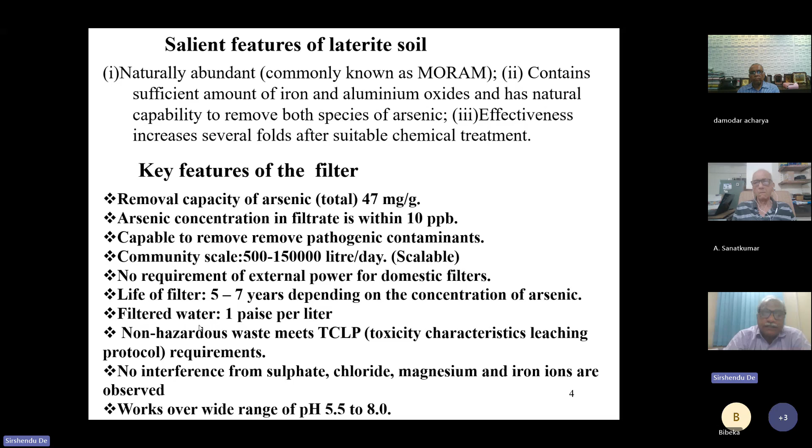Now, some technical terms and information I would like to present here.

This XRD figure shows that the raw laterite has presence of iron and aluminum compounds. The iron and aluminum phases identified in the XRD of the lateritic soil are iron silicon sulfide, magnetite, hematite, iron oxide, geothite, and iron silicon aluminum oxide. These particular phases of iron and aluminum are the potent adsorbent sites for arsenic.

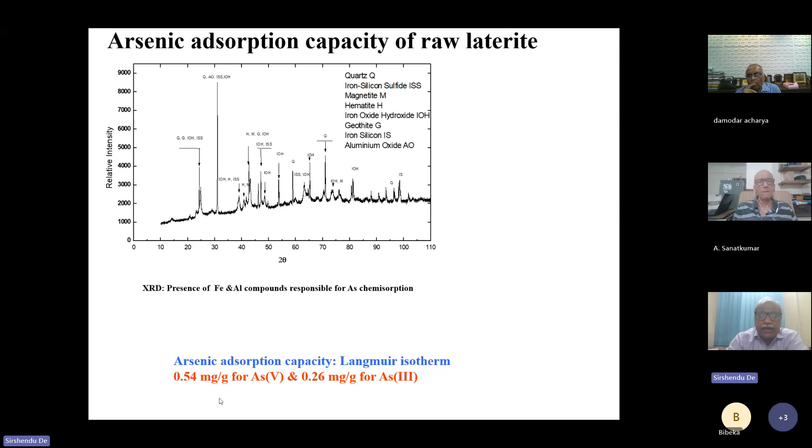Raw laterite itself has some arsenic removal capacity, however low it is. As I said earlier, it has a total of 0.8 milligram per gram of total arsenic removal capacity, although it is less. So what we do is a chemical treatment to increase its capacity several folds.

Now one can ask, how do I find out whether the lateritic soil that I am going to get from our Kharagpur area, or from the Deccan Plateau, or from Madhya Pradesh or Maharashtra, whether that is good enough for arsenic removal or not? For that, we define a scientific quantity known as the degree of lateritization. What is degree of lateritization? It is a ratio of silicon divided by iron and alumina.

The more silicon in the material, the less laterite-like it is. The more iron and aluminum oxide present in the material, the better it is for arsenic removal. So this degree of lateritization should be less for a desirable material, which is a potent source of adsorbent for arsenic.

So we have calculated the silicon to iron-aluminum ratio, the degree of lateritization, for different locations like Kharagpur, Bankura, and Purulia district, and we have found that it is minimum, around 0.42 to 0.5, between Kharagpur and Bankura. So Kharagpur and Bankura laterite are the best among the four.

So if you give me a material which is available from any part of the world, we will just do an EDX analysis that will take 15 minutes, and we will find out what is the degree of lateritization. If it is less than 0.4 or 0.5, then it's a very good material for arsenic removal.

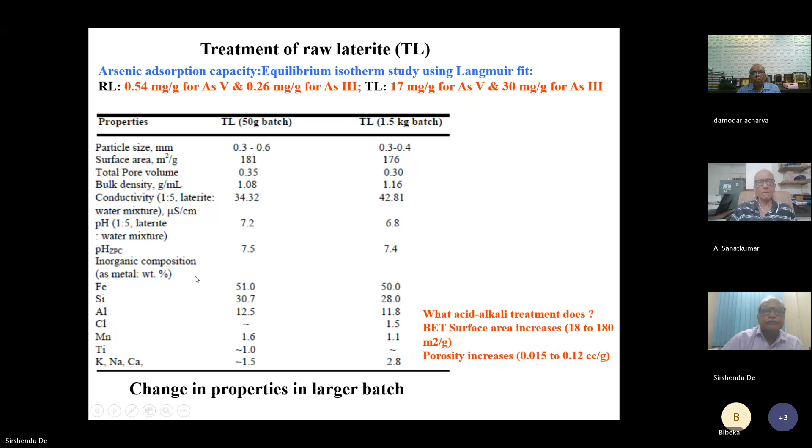Now we look into the disposal of the spent material. When the adsorption is over, it satisfies the TCLP protocol -- that means after its life is over, the material is exposed to harsh pH conditions, low pH as well as high pH. In both cases, the leaching of arsenic is minimal and below detection level. Therefore, no special treatment is required for disposal of the spent material.

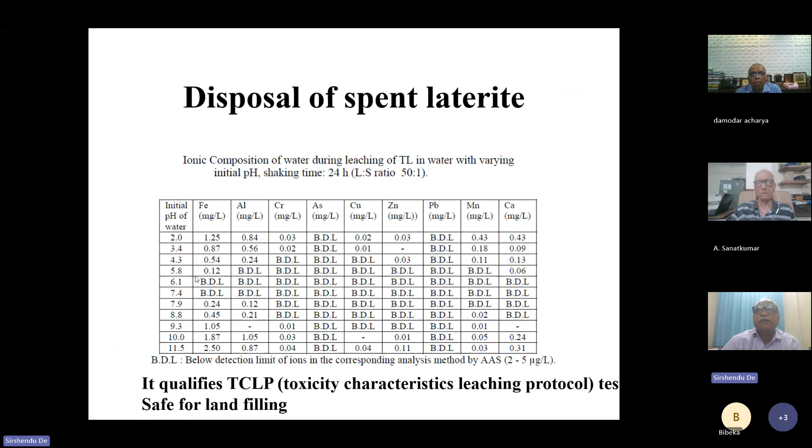It can be directly used as road fillers or land fillers. It can be used as one of the piling materials in the preparation of pavement blocks. Now we come to the detailed design of a single unit.

The single unit here I have shown is a composite bed, prepared with raw laterite at the top of the bed, which removes arsenic to some extent. This is followed by charcoal, basically activated carbon, which removes odor-causing material and organics. Then comes the treated laterite bed, which removes bacteria as well as arsenic. There is also bacteriostatic carbon placed at the bottom so that bacterial contamination from the bottom is prevented.

Now, before putting in this unit, one has to install an upfront unit for the removal of iron. All these filters are basically working with the adsorption principle, so there is an upfront unit for removing iron. Otherwise, in the long term, the iron will be deposited in the actual filter and the filter will be completely blocked. So iron is removed, followed by arsenic and bacteria, and this material is also very good for the removal of heavy metals.

Now we look into the design. There are two types of design: one by heuristic, another going by fundamental principles. The advantage of the fundamental physics-based principles is that it can withstand all sorts of fluctuations in operating conditions. So here we have used two performance parameters and governing partial differential equations, which represent the transport phenomena inside a particle and the transport phenomena occurring inside the fixed bed. And we have developed this performance curve.

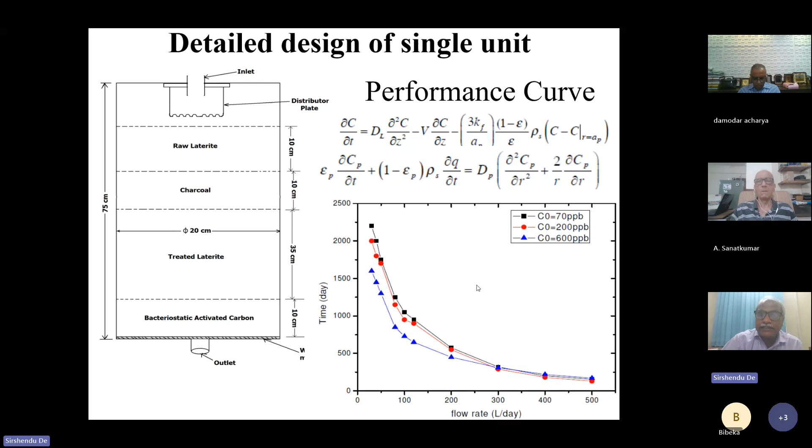Since its capacity is high, during its lifetime one need not go for a chemical-induced regeneration. So here are some snapshots of the filter.

So the first filter, we started this work in 2004. Then we gave lots of presentations to the arsenic task force, Government of West Bengal, and ultimately UNICEF came to us, and we put up a community-scale filter in an affected school in Rajarhat area, where the arsenic contamination was around 100 microgram per liter. This school's filter has a capacity of 500 liters per day.

There are 70 students, around 20 to 25 staff members, teachers, and the midday meal ladies and cleaners, etc. Out of the 500 liters per day, 250 liters is used for cooking the midday meal and drinking purposes. The rest, 250 liters, is used by the villagers. There is a tap outside where the villagers take the water.

So this was the performance of these filters. This data is for 6 years, from 2012 to 2018. In the left-hand panel we have put the arsenic concentration, and in the right-hand panel the iron concentration. Looking at arsenic, the black dots are the concentration in the feed and the red dots are the concentration in the filtrate. The black dots vary from 50 to 225-230 microgram per liter at certain times.

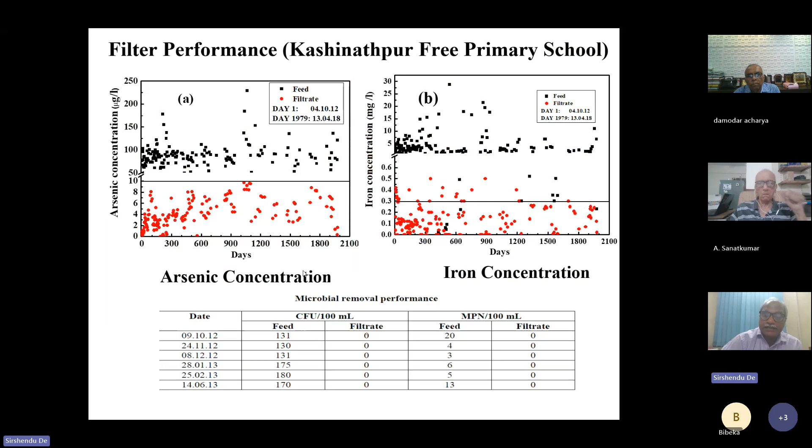Some of the domestic filters that we have deployed in various places. Now there are more than 50 places where we have distributed these in various districts as well.

Here I have given an example. This is a lady in whose house this filter was deployed. This is a hand-operated filter, so no electricity is required for this household filter. On the top bucket, we just put the water. There's a pinch cock that controls the flow rate of water into the filter body. In the filter body, there are different layers of material, as shown earlier, and the water gets filtered and comes out. There is no wastage of water like with an RO filter.

If you look at the performance over 3 years, 2012 to 2015, the concentration of arsenic in the feed is around 100, 200, sometimes 300 ppb, but in the filtrate it is always less than 10 ppb. If you look at the iron concentration, it can be as high as 4 to 5 ppm in the feed, but the concentration of iron in the filtrate is less than 0.3 ppm.

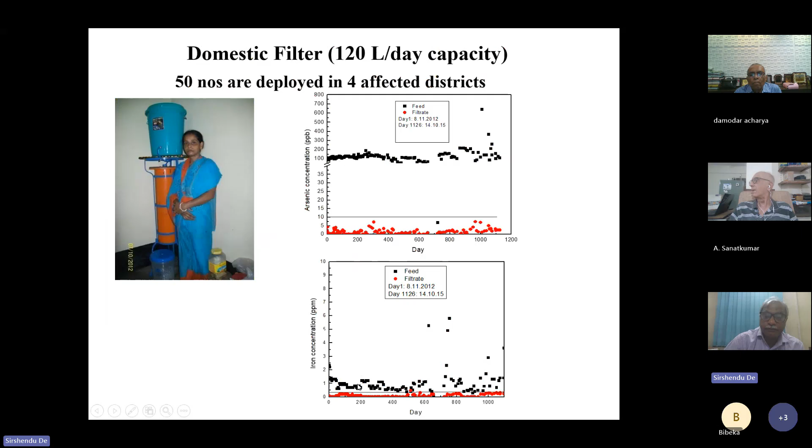Some more community scale filters that we have deployed in different places, like Ambika Girls School, with 1500 liter per day capacity, deployed in 2013, where the inlet concentration was 290 ppb and the filtrate is 2 ppb. Similarly in Malda Rotua Block 2, also sponsored by UNICEF.

After showing these results, we got approval and recommendation from the Arsenic Task Force, Government of West Bengal, and the technology was transferred to 3 companies. By now, one of these companies, a vendor working with government organizations like the Public Health and Engineering Department,

has deployed more than 550 filters of 2 meter cube per hour capacity in West Bengal and Assam. A Ranchi-based company has deployed community scale filters in different places in Jharkhand, Bihar, and UP. Another company sells the domestic filters and has deployed more than 100 filters in different affected areas.

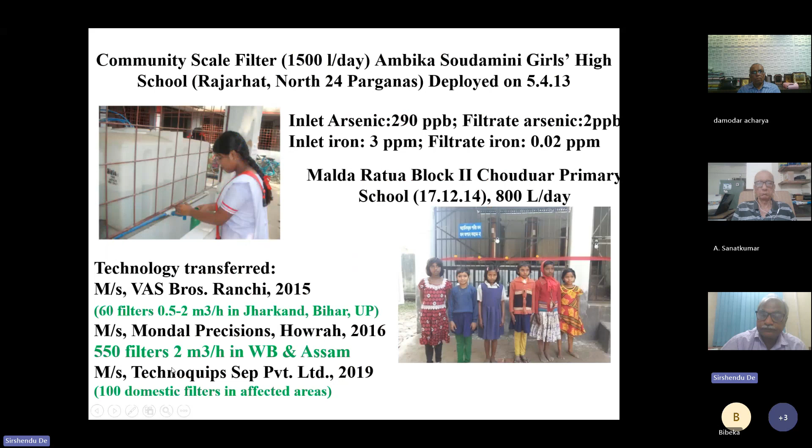This is one of the community scale filters, 2 meter cube or 2000 liter per hour capacity. Typically these filters run for 5 hours a day, producing 10,000 liters of water, catering to a cluster of villages. This is one place in Nadia district, where the concentration in the feed is 110 microgram per liter, and in the filtrate it is below detection level.

Similarly for iron. These are solar powered - there is a solar panel that pumps the groundwater up to the overhead tank, and from the overhead tank it flows by gravity through the filter columns, finally producing filtered water.

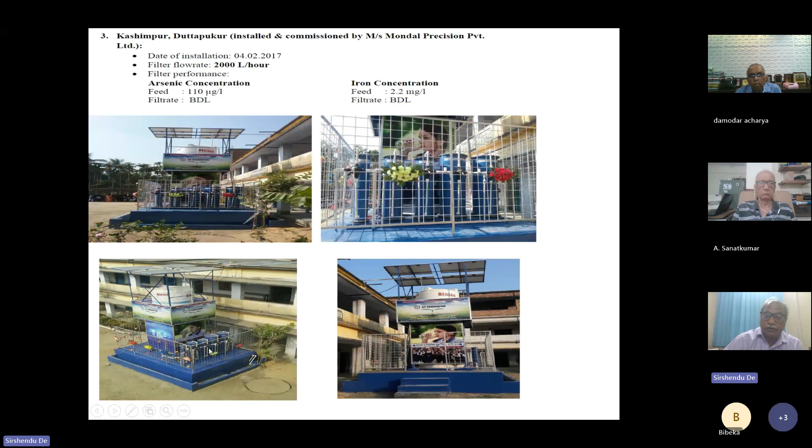This is a test report from the government Public Health and Engineering Department. Every district has a test house established by the Public Health and Engineering Department, Government of West Bengal, and the performance of our filters is monitored every month. This is one of the typical results shown in the test house of the Public Health and Engineering Department in Barasat division.

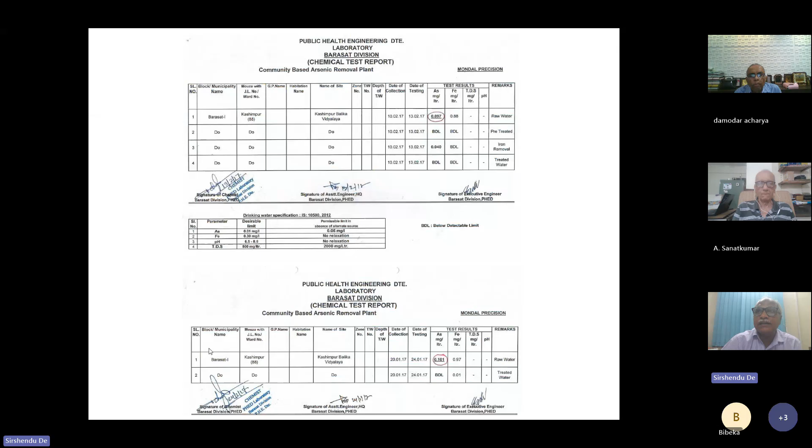It is not that we bring the samples to IIT and measure them ourselves. The performance of the community scale filters is continuously monitored by the state laboratories.

Let me talk about the elements of innovation in this technology. This is a low cost technology without compromising the quality of the material. If you look at the material cost, the laterite costs 100 rupees per kg, including electricity, utilities, and labor. Comparatively, activated alumina, a synthetic material, costs around 250 rupees per kg. The design has very high capacity and a long life of 5 to 7 years.

Then there is the value addedness - it removes iron, bacteria, and arsenic, all 3, and it also removes heavy metals like lead, uranium, zinc, and cadmium. There is no regeneration required during its lifetime, so the maintenance is minimum. And there is easy disposal - since it satisfies the TCLP protocol, we do not require any special treatment for the disposal of the spent material.

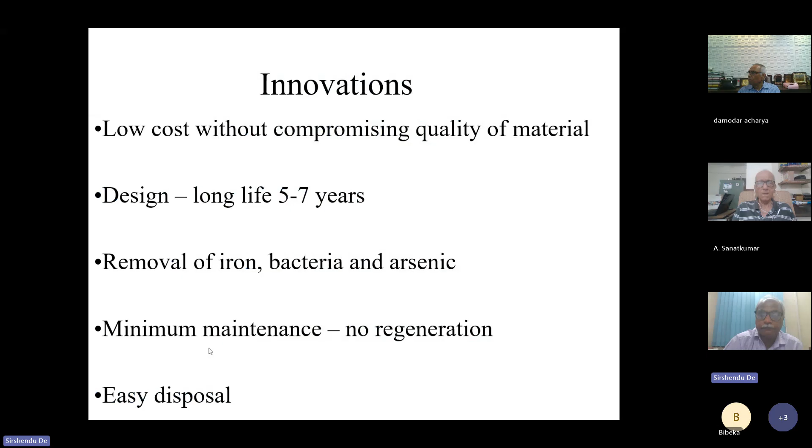So this is the status of the technology. It is shortlisted as one of the top 4 technologies in the Reed Elsevier Environmental Challenge in 2015. It is a finalist of the Dhirubhai Ambani Prize in 2016. We got the Indian Desalination Association Innovation Award in 2016, the Hindustan Dorr-Oliver Award from IIChE in 2017, and the NRDC Award in 2017. This technology is recommended by the Arsenic Task Force, Government of West Bengal, as well as the Mashelkar Committee recommendation we received from the Ministry of Drinking Water and Sanitation, Government of India. It has been rated as one of the 100 best innovations in India in 2021 by the Indian Innovators Association. It has been transferred to 4 companies for commercialization. 550 community scale filters are now installed at different places in India, catering to about 8 lakh people per day.

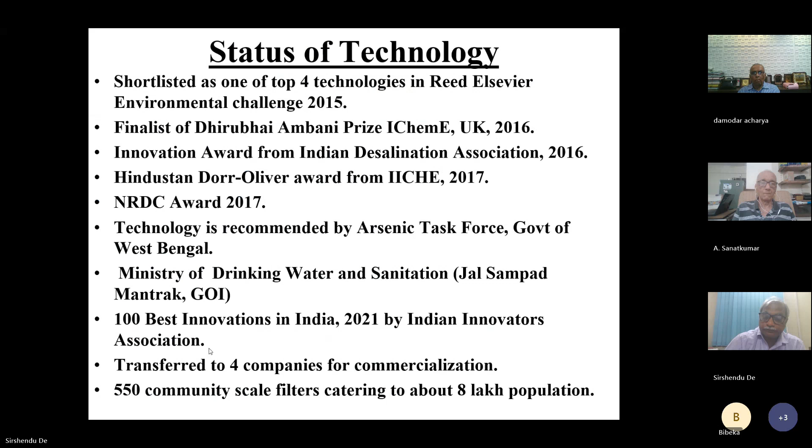Next case study, I'll be talking about the fluoride removal filter. Similar to arsenic, fluoride poisoning in the groundwater is also a rising concern. The disease caused is known as fluorosis. There are 2 types of fluorosis: dental fluorosis and skeletal fluorosis. Excess fluoride in the groundwater basically weakens the bone. In dental fluorosis, there will be yellow stains on the teeth, and it spoils the teeth in early years. In case of skeletal fluorosis, it is even more dangerous - the bones get weakened, and this can cause an early onset of osteoporosis.

200 million people have been affected in 25 nations, and 11 states have been affected in our country, including Telangana, Andhra, Rajasthan, Gujarat, Punjab, Haryana, and 4 districts in West Bengal like Purulia, Bankura, Birbhum, and North Dinajpur. They have been adversely affected by the fluoride concentration in the groundwater.

The maximum permissible limit of fluoride in groundwater is 1.5 milligram per liter. If you compare, the allowable concentration of arsenic is 10 microgram per liter, while fluoride is 1.5 milligram per liter - so there's a 1000 order of difference between the allowable limits. That means arsenic is more lethal compared to fluoride. But typically, fluoride concentration occurs in groundwater between 2 to, in some places, 20 ppm or 20 milligram per liter. So that is also equally bad.

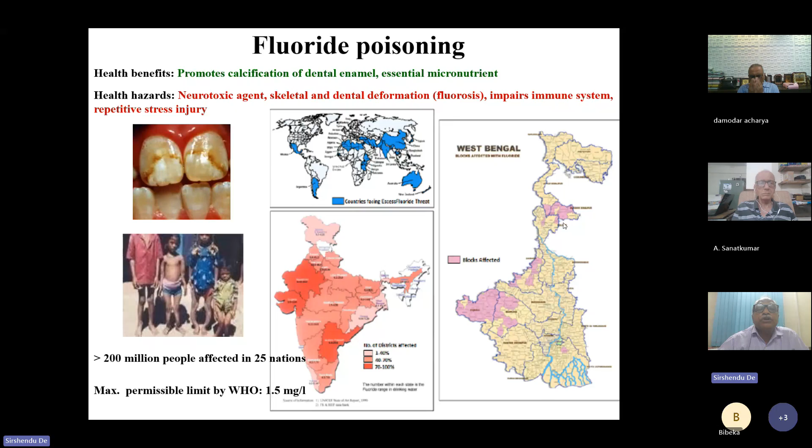So we tried to look into how to remove this pollutant from the groundwater. We did a market analysis and looked into various existing fluoride removal filters - there are 2 technologies that typically exist. One is membrane-based reverse osmosis nanofiltration, and another is adsorption-based using activated alumina or activated carbon. The membrane-based filters are very expensive - the maintenance is not easy, and there will be fouling of the membrane, requiring replacement, which is a costly affair.

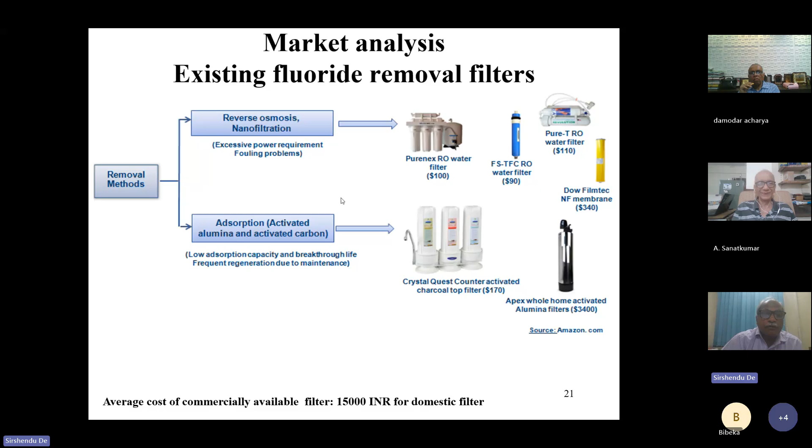Even for activated alumina based filters, the fluoride adsorption capacity is very low, only 5 milligram per liter, so it does not last more than a week. Within a week, one has to do chemical regeneration, which is expensive - chemicals are used, and the regenerated fluoride again goes back to the groundwater and recontaminates it. So the average cost of these commercially available filters is 15,000 rupees for a domestic filter.

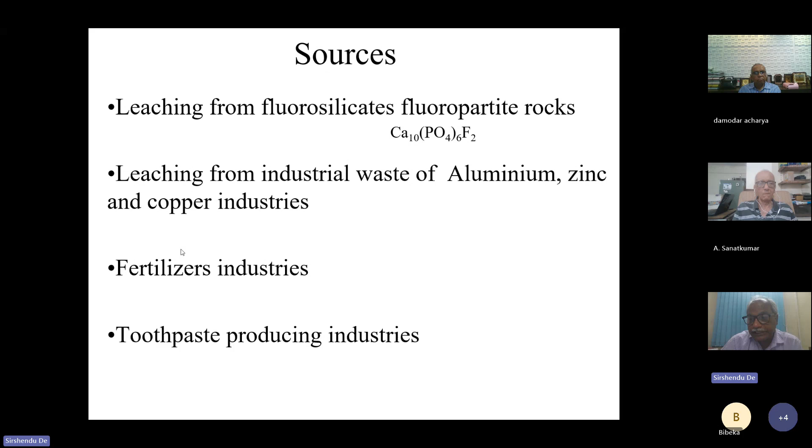Now we tried to develop a material for fluoride removal, and tried to find out why fluoride is contaminating the groundwater. We found there are 4 sources of fluoride leaching and contamination. First, like arsenic, fluoride is available in rocks in the form of calcium fluoroapatite - this phase degrades over millions of years because of weathering and other causes, releasing fluoride that contaminates the groundwater. Leaching from industrial waste like aluminium, zinc, and copper industries can also contaminate the groundwater. Fertilizer industries, where fluoride is used, can also leach out and contaminate groundwater. Toothpaste producing industry effluent is also leached and contaminates the groundwater. So these are anthropogenic as well as geogenic causes for fluoride contamination in the groundwater.

Now, what do we do? We tried to develop the hydroxyapatite phase. When this hydroxyapatite phase is there and it is replaced by fluoride, this is known as fluoroapatite. So we tried to develop this hydroxyapatite phase in the laboratory using simple chemicals.

This calcium phase removes the fluoride, because one calcium attracts two fluoride atoms, so it forms calcium fluoride, CaF2. So two fluoride atoms - so what do we do?

We carefully substitute some of the calcium with aluminum, so we call it aluminum substituted hydroxyapatite. This increases its capacity several folds, because aluminum attracts three fluoride atoms while calcium attracts two. So if we substitute some calcium with aluminum, its fluoride removal capacity increases. We developed this aluminum substituted hydroxyapatite phase in the laboratory using commercial grade chemicals.

Now this material is produced in powder form. The powdery material cannot be used as a fixed bed for fluoride removal. So what we did is develop this particular phase in situ with a porous carbon scaffold. The porous charcoal, which is commercially available porous carbon, is used as a support material, where inside the pores and on the surface, this aluminum substituted hydroxyapatite is generated in situ.

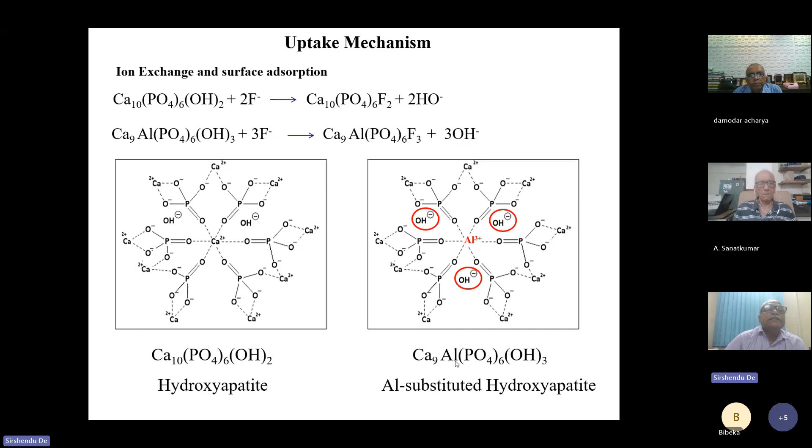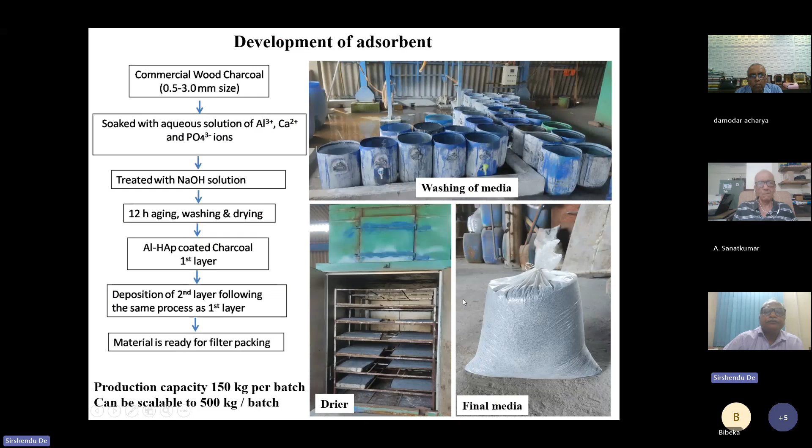Since we are producing the carbon scaffolds in millimeter size, they are granules - we are not producing powder. Ultimately we are producing granules, and this is the final media that is produced. Using this media, the filter is developed. So these are some of the properties.

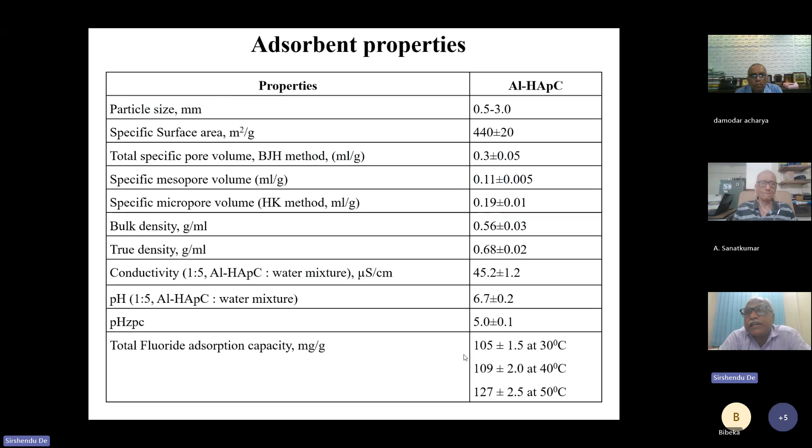If you see, the total fluoride adsorption capacity of this media is 105 milligram per gram at 30 degrees centigrade. The nearest competitor is activated alumina, which has a capacity of only 5 to 6 milligram per gram. So almost 15 times more capacity we get from this particular media.

So we compared this with the granular media, and we found that among all the granular media, we have obtained the highest ever reported value - 105 milligram per gram - which has a particle size of 0.5 to 3 millimeters. This is an ideal medium size for preparation of a fixed bed adsorption reactor.

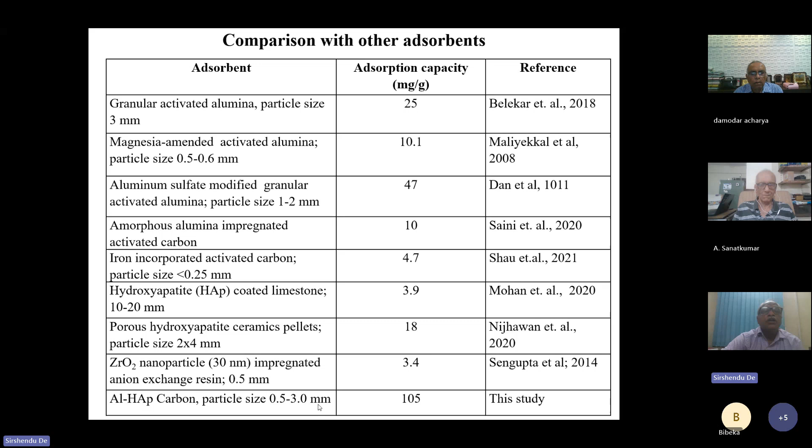Then we characterize the adsorbents using FESEM and EDAX analysis. It is clear that this is the carbon scaffold I was talking about, and inside the carbon, the hydroxyapatite phases have been generated, and those are the potent sites where the fluoride gets absorbed. If you look into the EDX curve, there is a peak of fluoride after adsorption which was not there before adsorption. This proves that the fluoride is being absorbed within the media.

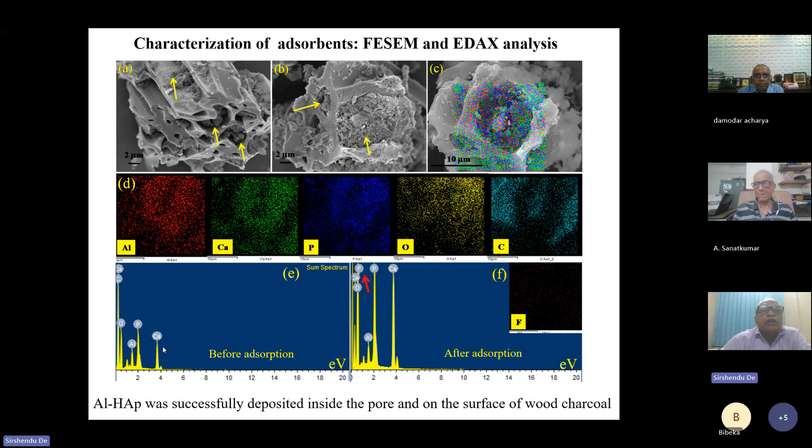Phase analysis using XRD and FTIR spectroscopy. This analysis shows the signatures of the presence of aluminum hydroxyapatite inside the carbon.

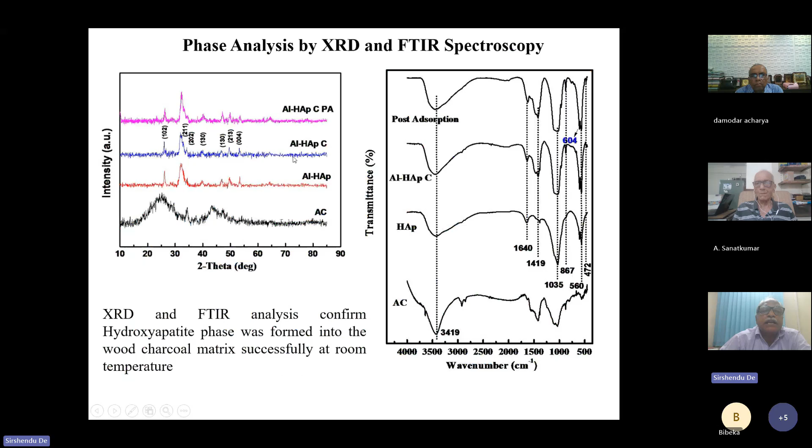Then comes the disposal of the spent medium - how we dispose of the medium. Since we are using the carbon scaffold, this particular medium will have some calorific value. The calorific value of lignite coal is 6,500 calorie per gram. The calorific value of our aluminum hydroxyapatite Al-HApC material is 2,200 calorie per gram. So therefore we can extract some calorific value out of this media.

So this media, after its life is over, can be used as fuel. If we mix the spent media with lignite coal in the ratio 1:20, we get a calorific value of 5,000 calorie per gram. The spent media adsorbent is mixed with coal and used as fuel.

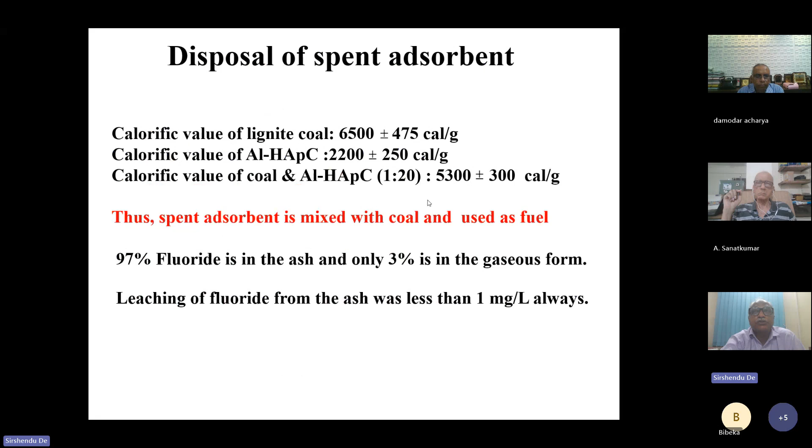We have done the analysis - 97% fluoride is in the ash and only 3% is in gaseous form. So it does not contaminate the environment, and leaching of fluoride from the ash was always less than 1 milligram per liter. So after its life is over, this media can be used as fuel, and the ash will not contaminate groundwater, and the gaseous form also does not have any fluoride contamination.

Now we have prepared the domestic filter as shown earlier, using the same layer-wise media, and this is deployed in different places of Bankura and Purulia district. This is one place, in his house, where the domestic filter was installed, and more than 1 year of data is available. If you look at the feed concentration of fluoride, it varies.

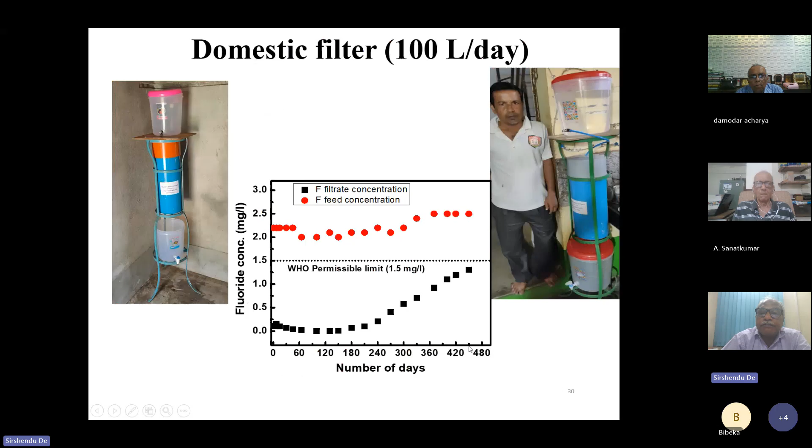It is around 2 to 2.5 milligram per liter, and the filtrate concentration increases over time. This particular filter was designed for 1 year. If you look at the performance, it stays below the permissible limit, working fine up to 450 days. After that, the filter media will be changed.

Another community scale filter of 500 liter per day was installed in one of the schools in Bankura district. This filter is still running. Here the feed concentration is around 3 milligram per liter, and the filtered concentration is always less than 1.5 milligram per liter.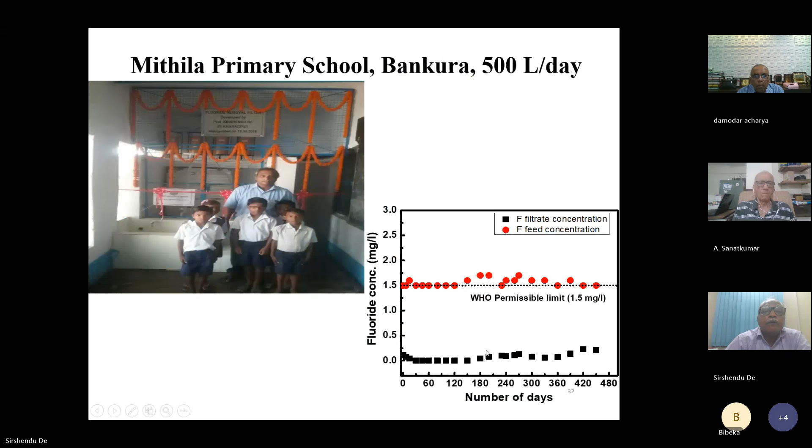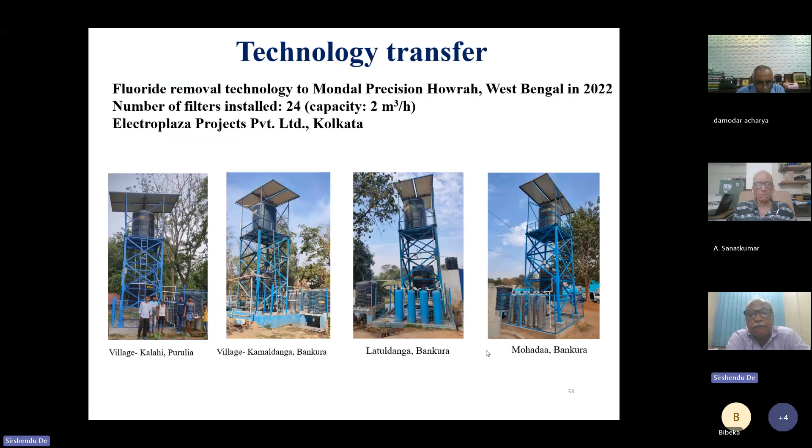So this technology was transferred again to companies, and they came up with more units. By now there are 34 filters deployed in different places of Purulia and Bankura district, and now this chart is very important.

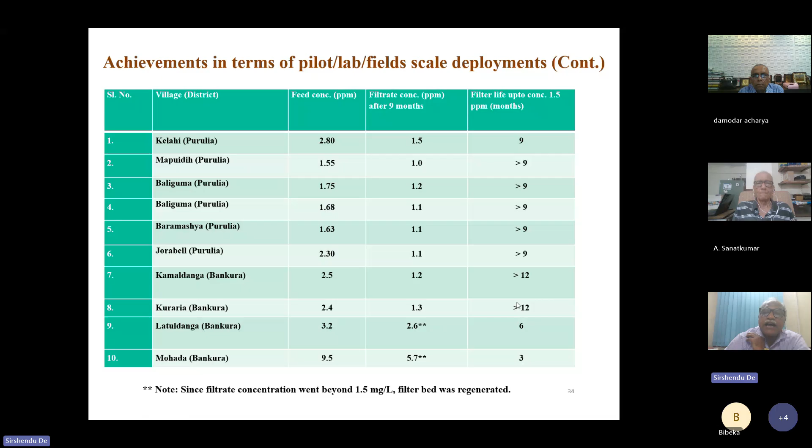This gives the filter life at different locations. Based on the feed concentration of fluoride, we have charged around 80 kg of the material in 2 columns, and we have seen that depending on the feed concentration of fluoride, the filter life varies from 9 months to more than 12 months. So these filters are designed for 12 months, and after 1 year the media has to be replaced.

One of the domestic filters has been deployed in a house where the kid is having dental fluorosis.

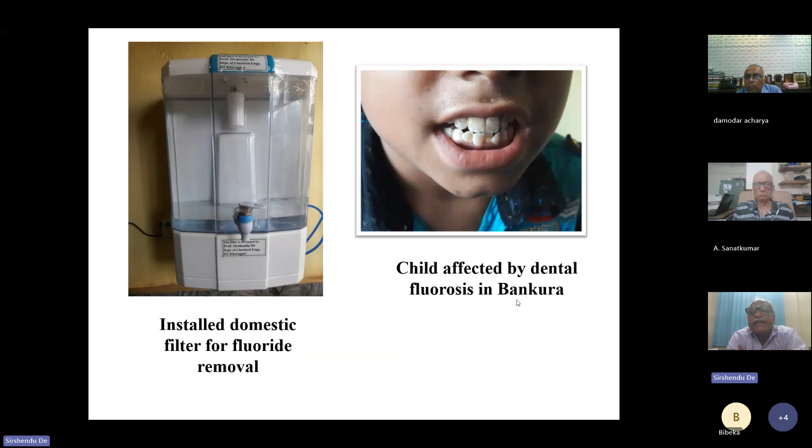Let us do a cost comparison with other filters in the market. Looking at different filters of the same capacity, 120 liter per day domestic scale filters, the cost varies, above 15,000 rupees, while our cost is 4,600 rupees, around 5,000 rupees for 1 year. After 1 year, the filter media has to be replaced, requiring a recurring cost of around 600 rupees. So the cost is 1.3 paisa per liter.

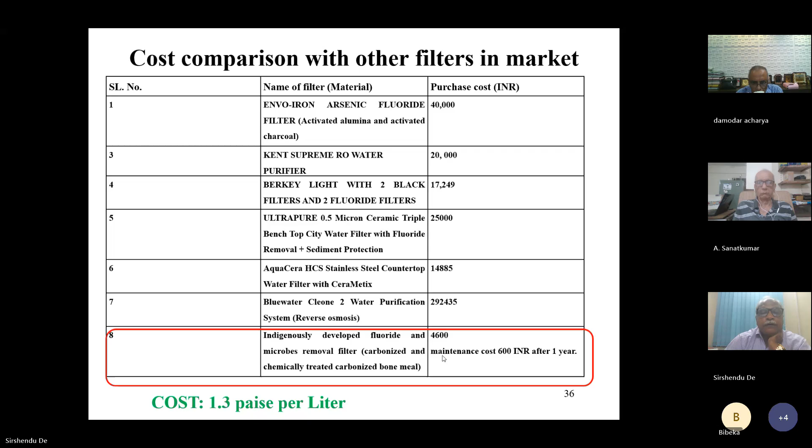So this is the status of this technology. It has received the IGCW award by Green Chemistry Foundation in 2023. It is recommended by the Fluoride Task Force, Government of West Bengal, and transferred to 2 companies for commercialization. Currently, 34 community scale filters are in operation, catering to about 1 lakh people in affected districts per day.

Next case study, I'll be talking about the treatment for rice mill effluent. In a typical rice mill, depending on its size, one can get effluent to the tune of 50,000 to 150,000 liter per day. That much water is extracted, and they use the same water for 2 cycles, meaning every week they extract water from the ground 3 times.

Just imagine, in the district of Burdwan in West Bengal, there are 1,500 rice mills. Imagine how many rice mills are there in all of West Bengal, each extracting roughly 150,000 liter of water, 3 times a week, from the groundwater, and how the groundwater will be depleted.

The effluent generated from these rice mills is high in organics, foul smelling, and there is no proper treatment. They just discharge it to the nearby canal. When this water goes off from the canals to agricultural lands, there is protest, and farmers often do road blocking. So proper treatment is required.

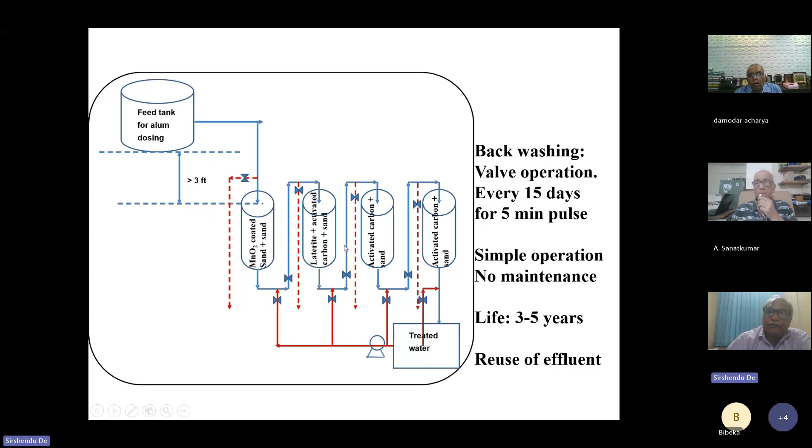So this is a 40 KLD plant, 40,000 liter per day capacity pilot unit installed in Sreema rice mill in West Bengal, in Hooghly district. The water flows through a series of columns, and finally this is the raw water, which is yellowish in color, and this is the treated water, which is very clean.

If you look into the various parameters, this is the performance for 2 years. It was installed before lockdown, 13 March 2020. Initially it was 10 KLD capacity. Later on, its performance was so good, it was upgraded to 40 KLD capacity. And at the end of 2 years, it is showing almost steady performance.

The filtrate, that is clean water, it is being backwashed with pulses of 5 minutes. But is all the clean water used in the backwash, or only a small quantity? Small quantity will be required every 15 days. Every 15 days, one has to do a backwashing.

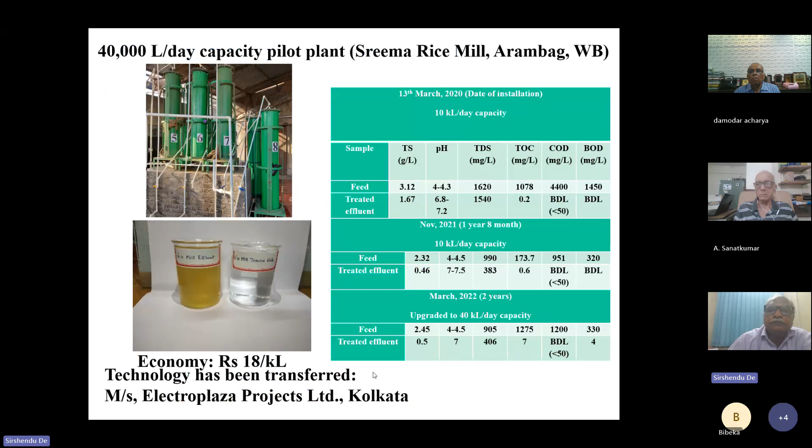Next case study, I'll be talking about cyanide removal from steel plant effluent. In a steel plant, there are lots of cyanide in the effluent. These cyanide concentrations can be anything between 5 to 20 milligram per liter, and the permissible limit of cyanide in any surface water is 0.2 milligram per liter.

So what we do, we did a very simple treatment in presence of UV light and air bubbling. We add hydrogen peroxide, at a dose of 5 liter per meter cube. The hydrogen peroxide gets degraded to form hydroxyl radicals OH dot, and in presence of air, they finally form bicarbonate salt, nitrogen gas, and water.

So what we require is a hydrogen peroxide dose of 5 liter per meter cube with continuous air bubbling in presence of UV light. So it is a photodegradation technique, but without any sludge generation.

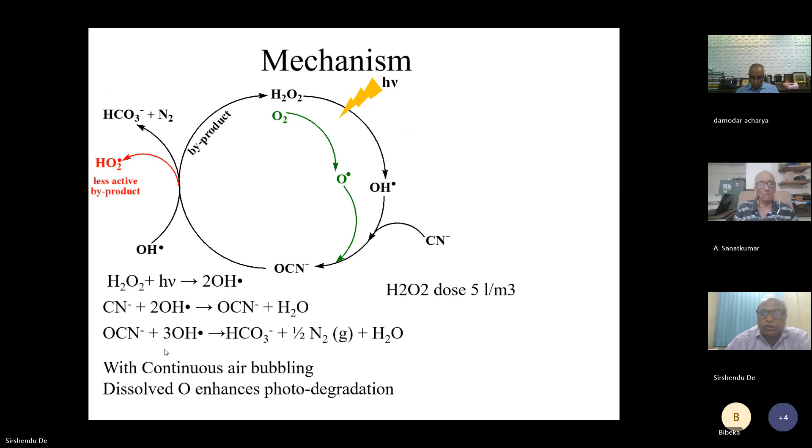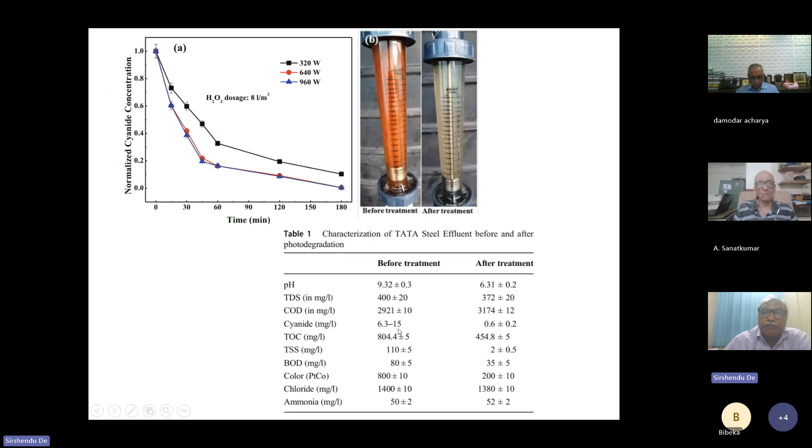Using this technique, we developed a process for Tata Steel, because we have a project with Tata Steel. If you look into the cyanide concentration before and after treatment, it was up to a maximum of 15 ppm before, but after treatment it was 0.6 ppm.

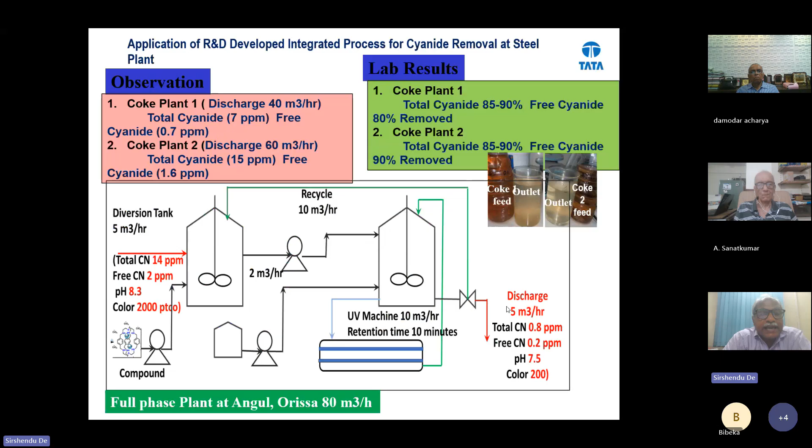So they came up with a plant with a capacity of 5 meter cube per hour in the Jamshedpur site, at the Tata Steel site, and they ran this plant with our technology for 6 months. They developed confidence, and came up with a plant at Angul with 80 meter cube per hour capacity, and it was working fine. Since then, I would like to mention one of the shortcomings of this technology.

This plant was run for about a year without any problem, and then suddenly I heard that the plant was stopped and not in operation. Then I inquired what is the problem. Ultimately it came out that it is not a limitation of the technology.

It is because the hydrogen peroxide we use in the laboratory is just 1 liter, 2 liter, but in the plant, where you are treating 80,000 liters of water per hour, the amount of hydrogen peroxide requirement is very high. So they have to store hydrogen peroxide, and storage of hydrogen peroxide is not normal, because under normal temperature and pressure, hydrogen peroxide breaks into oxygen gas. If you do not take proper precautions, one has to sprinkle water onto the storage vessel to keep down the temperature.

If you do not do that, there will be a build-up of oxygen gas after its degradation, and there may be a blast. In fact, that has happened because of not taking proper precautions. The whole storage vessel storing hydrogen peroxide blasted, and there was an accident, and that's why this plant was stopped. But that was not the fault of the technology, it was the fault of the storing of hydrogen peroxide. That means whenever a technology becomes successful even at real life scale, it is not the technology but the other paraphernalia and procedures that have to be followed properly.

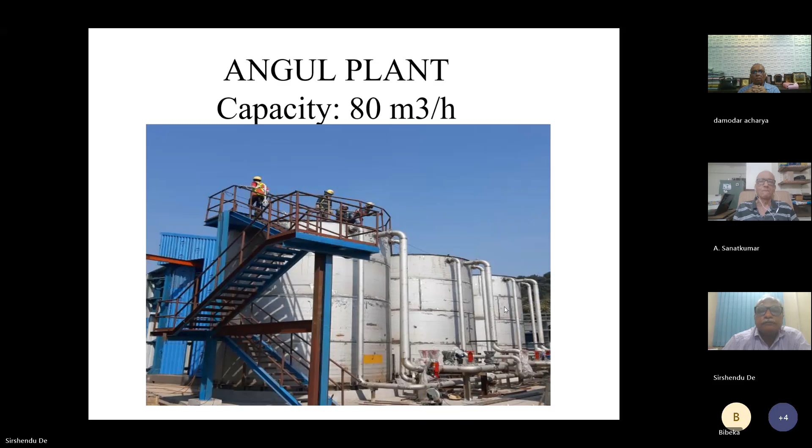Next case study, I will talk about the treatment of refinery effluent. Here we are talking about an effluent of HMEL, the HPCL Mittal Energy Limited. They have their refinery plant at Bathinda, Punjab. The problem in their plant was they had a standard effluent treatment plant consisting of primary, secondary, and tertiary effluent treatment.

In the secondary treatment, they use the activated sludge procedure, and after that they use a membrane bioreactor as tertiary treatment. Their final objective is to get water with COD less than 20 ppm at the final stage. They were not achieving that because their secondary treatment plant was not operating properly. The membrane bioreactor tertiary treatment was very expensive. The membrane needs replacement every year, and every year they spend 5 crore rupees to replace the membranes. So they wanted a simple technology to remove COD.

So our objective was to do away with the secondary treatment process. The secondary treatment is basically the most time consuming - it is very slow, and it is also space consuming, requiring a huge amount of space. So that becomes a bottleneck in most cases. The third most difficult thing is that the bacteria nurtured in the activated sludge process for degradation of organics - maintaining those bacteria and their growth environment is also difficult.

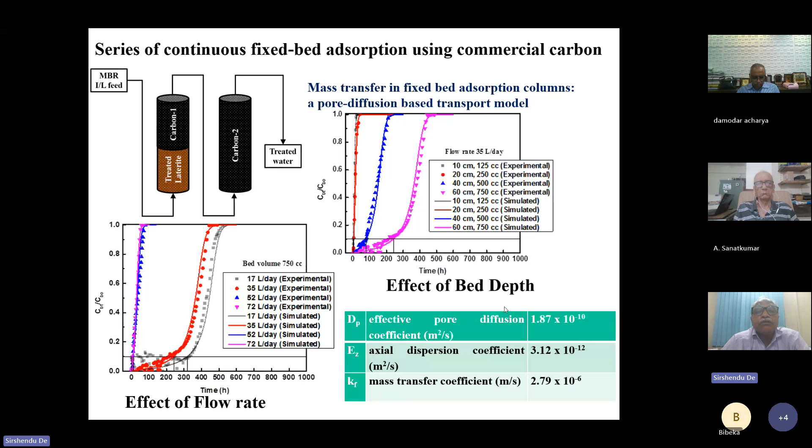So what we did was use two continuous fixed bed adsorption columns using commercial carbon, and we were able to bring down the COD concentration to less than 20 milligrams per liter. We developed a scaled up process flow diagram where first we give a laterite column along with an oxidation medium, then followed by the carbon column. There are 4 carbon columns which will be used to remove this.

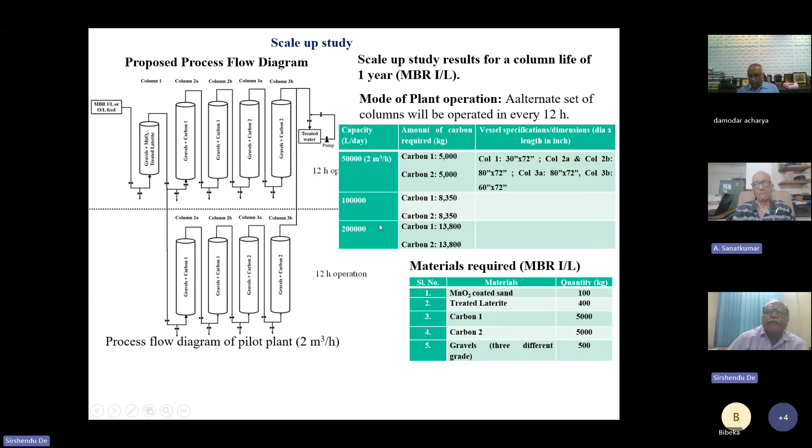Using the fundamental theory, we scaled up this system and proposed the amount of carbon required, and the specification and dimensions of the various columns required for 2 meter cube per hour, 1 meter cube per hour, 50,000 liters per day, 100,000 liters per day, and 200,000 liters per day. So they came up with a plant of 50 meter cube per day capacity at their site, and now they are doing trial runs with this plant.

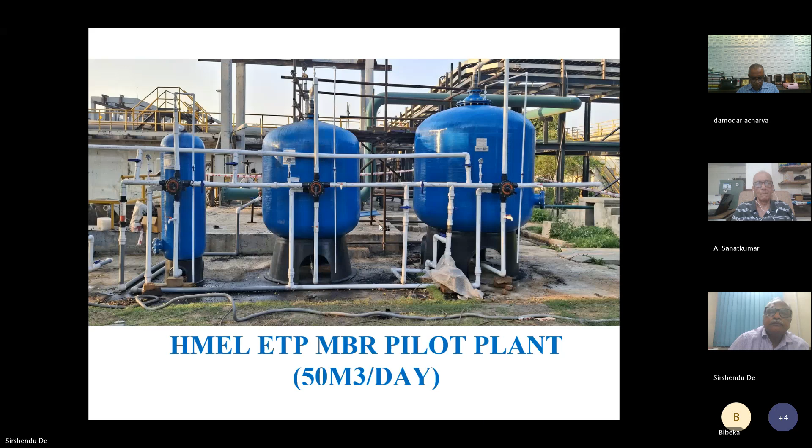Next, we talk about the treatment of sewage water for reuse. This project we got from Kolkata Municipal Corporation. Here, the sewage water that is being wasted - if we can reduce the parameters to a level such that the water can be used for road cleaning, gardening, and tree cleaning, etc. So we developed a simple process, and the whole focus was to make the primary and tertiary treatment so efficient that we should not be dependent on the space and time consuming secondary treatment. That means we would like to do away with the secondary treatment process altogether.

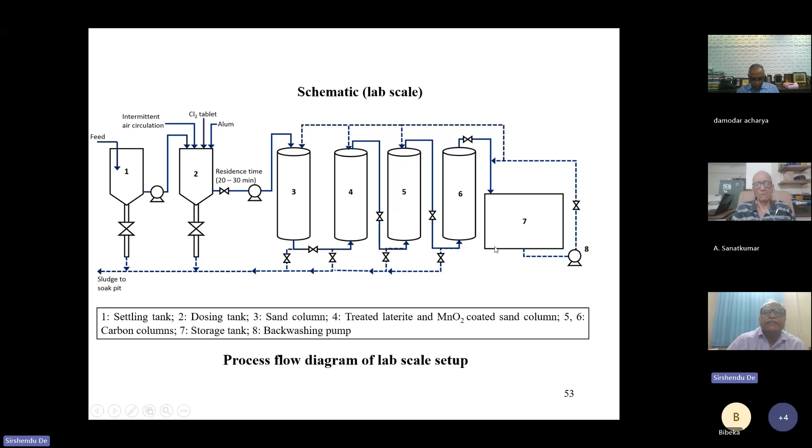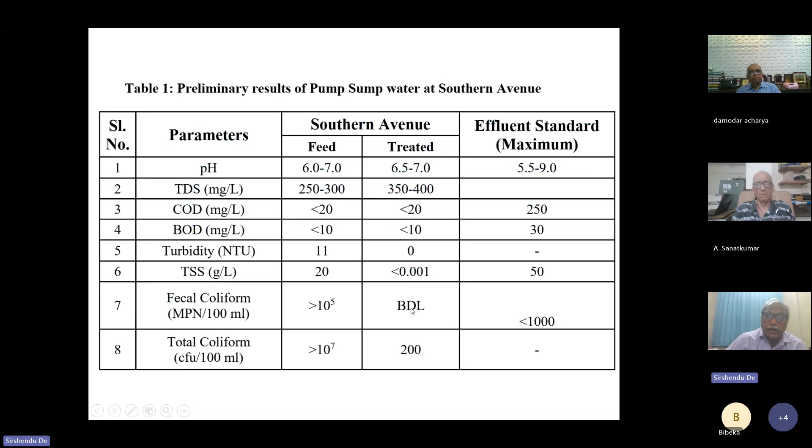I have some data on the results from different locations. We used this technology to check the process for water from 3 locations. One is Southern Avenue - this is the standard given, and our treated water behaves well within the standard. This is the feed water, which is slightly yellowish in color, and the filtered water is clear, crystal clear.

Next comes the Mukundapur Canal. This is one of the canals in the eastern part of Calcutta, where the feed water is dirty, and we get clean water, with all parameters of the treated water well below the standard limit.

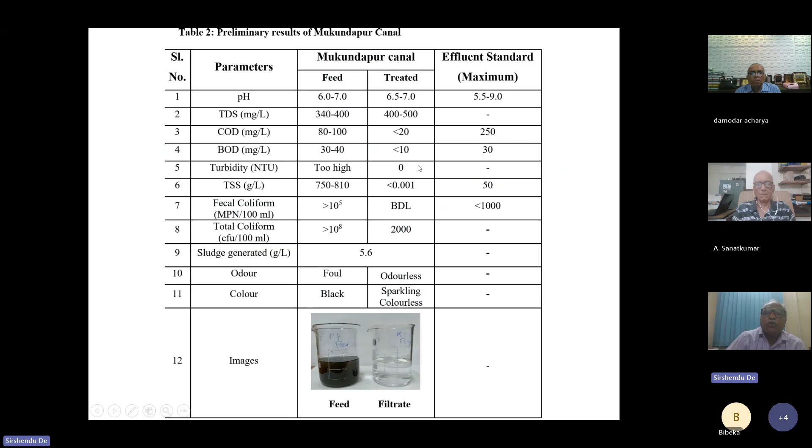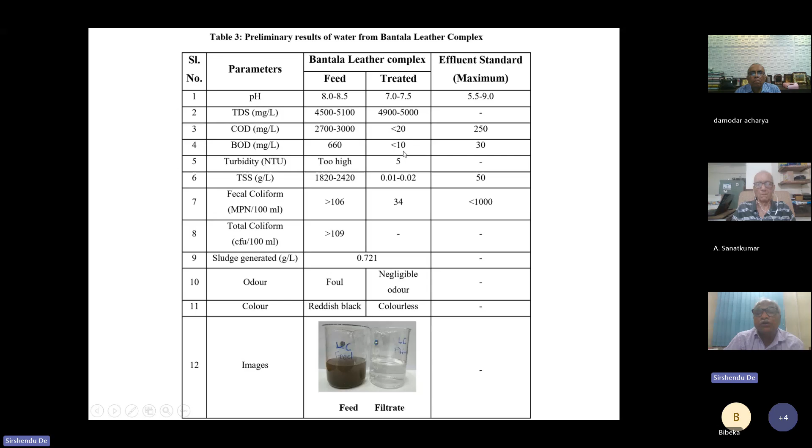Then the Bantala leather complex is the most difficult area, where there will be chromium. So here we use treated laterite to remove the heavy metal chromium, and after treatment we are able to clean this water to reusable quality, not for drinking purpose. This will be used for road cleaning, gardening, etc.

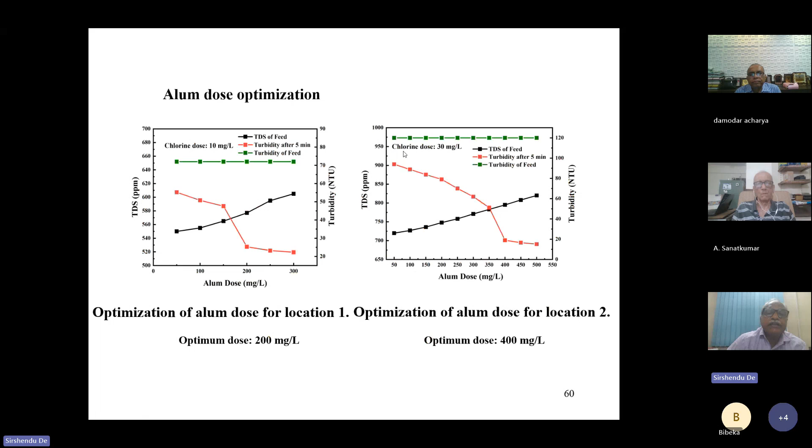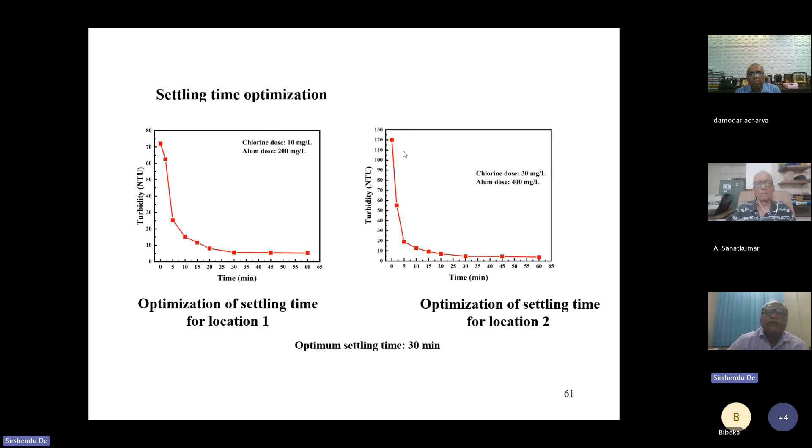Finally, they gave us water from 2 locations, and we optimized the chlorine dosing and the alum dosing. Using these optimized doses, the primary treatment is very important in this case. We kill all the bacteria by chlorine dosing, then give a settling time of 30 minutes so all the sediments settle down. Then we take the supernatant and pass it through a series of filters.

This is a long-term performance test, with a flow rate of 36 liters per day and 144 liters per day, almost a 70-hour operation. The COD was 320 milligrams per liter in the feed, and the filtrate we get is less than 20 milligrams per liter. Even if you increase the flow rate 4 times, you still get almost the same performance, so flow rate is not an issue. The idea is that if we do primary treatment properly, the tertiary treatment will take care of the other parameters.

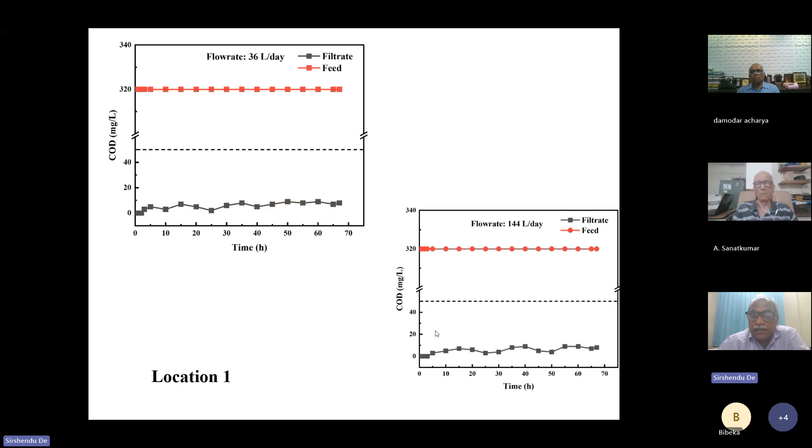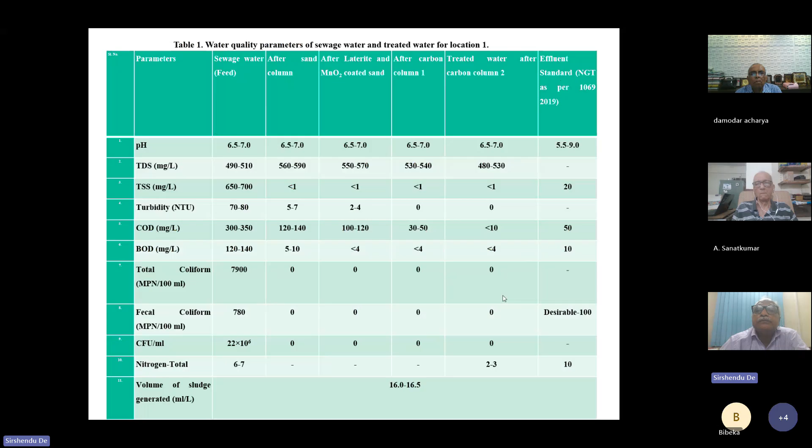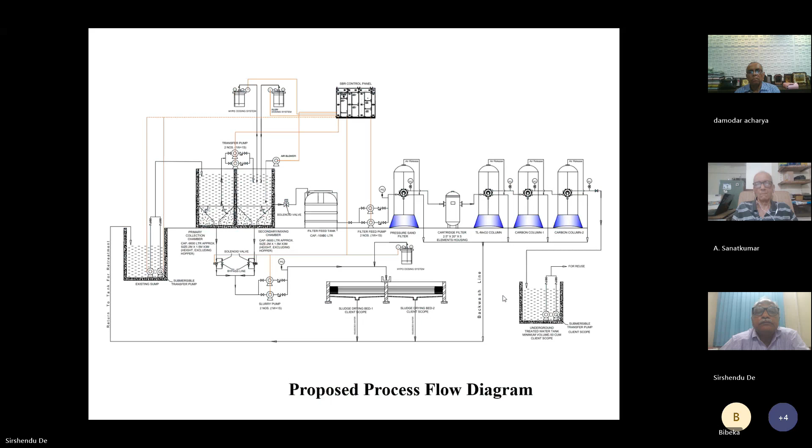So I come almost to the end of my presentation. What is the takeaway? The takeaway is that for a good, low-cost technology without compromising quality, we don't need a groundbreaking invention. We can innovate and improvise existing technology with the aim to reduce cost, improve accessibility, value addedness, and performance. Success of the technology lies in its outreach capacity and affordability, so that a person staying in a remote village, a marginal common person, should be able to afford it. That will be the success of the technology.

And of course, willingness to take the research to the end is important. Sometimes we see research start, and when the scholar gets their PhD degree, the research ends there, and the next scholar starts afresh. It should not be like that. A sustained effort is required, where 3 to 4 generations of students may be needed to take a technology from laboratory scale to field scale.

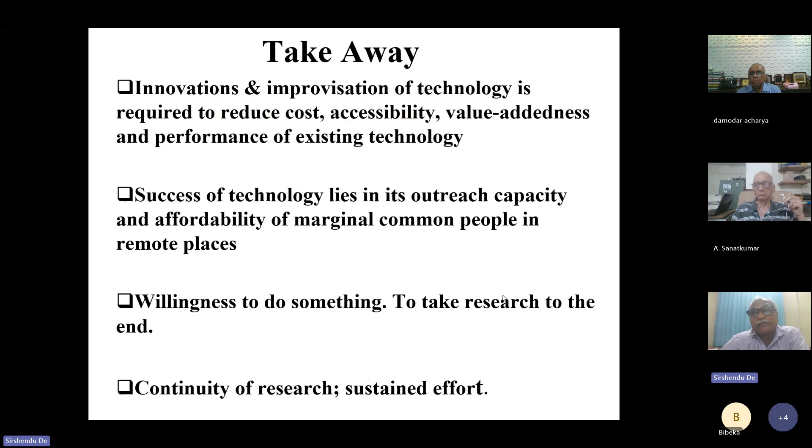So I acknowledge various collaborative agencies, UNICEF, DST, Public Health and Engineering Department, NGO partners, various research scholars, staff members, and analysis experts of the department, etc.

Thank you very much. So if you have any queries, I'll be able to answer them.